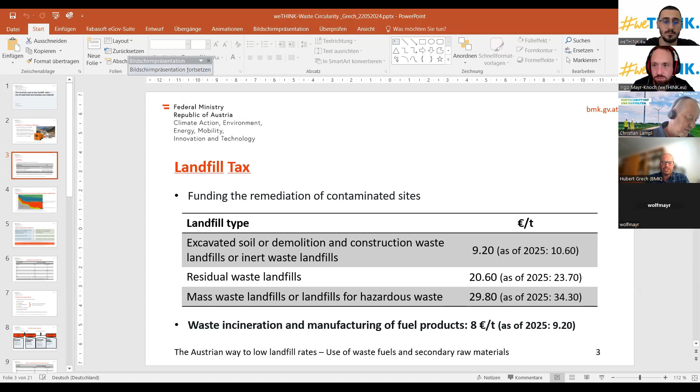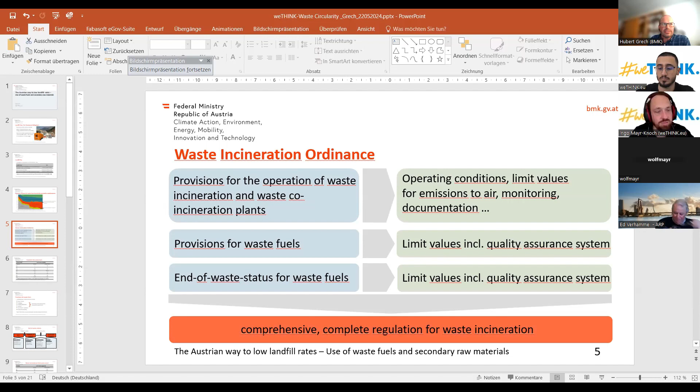And additional to these limit values, we have a very comprehensive quality assurance system. This quality assurance system consists of the input control, the sampling, sample preparation, analysis. You need an assessment certificate and an external monitoring. And the three important parts, the sampling, preparation, and the analysis, have to be carried out according to the international standards of the ISO TC 300. So we have a unique application of these different provisions because of these international standards.

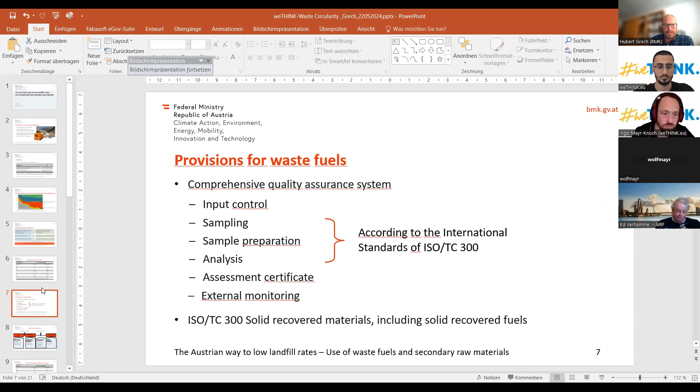Now some details about the end of waste criteria regulation in Austria. It's possible to reach the end of waste status for waste fuels. And here you can see a little scheme of this procedure. Starting with the waste, we have first some exclusions. That means for hazardous waste and medical waste, it is forbidden to reach the end of waste status. Then you have a classical production of waste fuel.

And after this, you have a waste fuel where you can reach the end of waste status when you fulfill some product criteria. These product criteria are above all limit values, but also, again, the provisions for sampling, sample preparation, analysis, etc. If you fulfill these end of waste criteria, you no longer have a waste, but a product, some kind of a conventional fuel. And this fuel you can use as a product. That means you don't need a permit according to the waste management law. And that makes it much easier to use these products in plants outside of the waste management system.

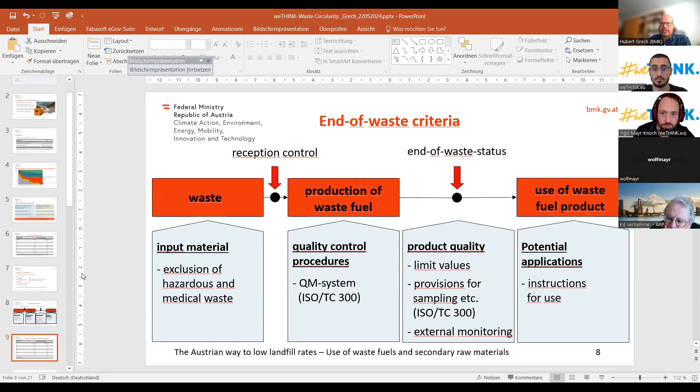We have some instructions for use. That means although you're outside of the waste management law, you have to fulfill some provisions. And the most important provision is that you have to fulfill a limit value for the dust of 20 milligrams per cubic meter. These waste fuel products, let's say we have two types of waste fuel products. The waste fuel products from waste wood, and another type are the waste fuel products that are not from waste wood.

In summary, these limit values are very strict. So you can really reach the end of waste status only with very clean waste fuels. And in fact, nearly 95% of the waste fuels which reach the end of waste status in Austria are biomass waste fractions.

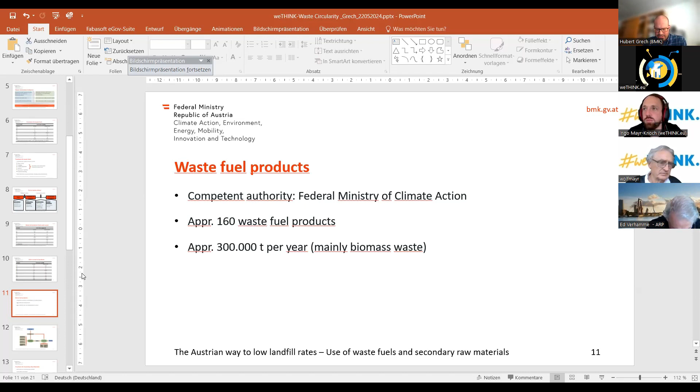These were some details about the waste incineration ordinance. Now I will come to the secondary raw materials. And when I start, I first want to have a look at a simple procedure of the cement production process. You can see there are inputs and outputs in the cement production process. And when you look at the first step, here we have the production of the cement clinker. We have as an input the raw material, the primary fuel, the waste fuel, and the secondary raw material. And as I said before, we already have regulated the waste fuel in our waste incineration ordinance.

One very important output of the production is the flue gas. And the flue gas is also regulated by this waste incineration ordinance. Then we have the production of the cement in the cement mill. Here again, we have the raw material and the secondary raw material as an input. And for sure, the important output of the cement production process, the cement itself.

And here you can see we have some input and output streams where we have no regulations, or let's say where we need a regulation to have a complete system. That means we need a regulation for the secondary raw materials as an input, but also for the cement. And therefore, we have elaborated a guideline for secondary raw materials in Austria. And this guideline regulates the secondary raw materials and the cement. So we have a very complete system of the whole process.

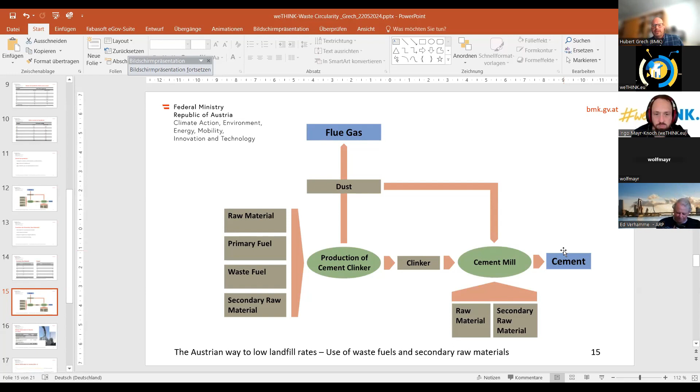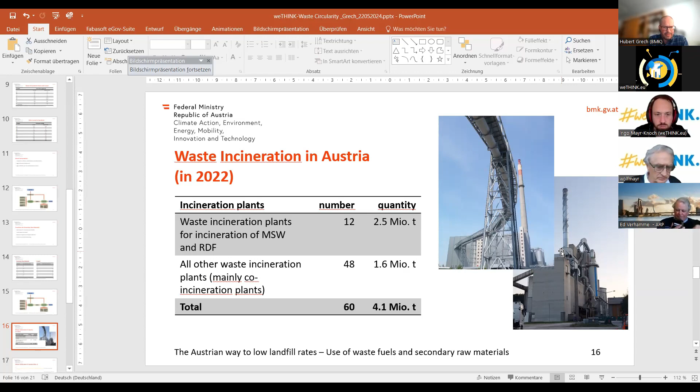On the next picture, you can see the development of the incinerated waste in Austria over the last 10 years. At first sight, you can see it's nearly constant. Even in the COVID crisis, we have a very constant amount of waste incineration. On the second sight, you can see a little increase here in the blue line. This is the line for the waste incineration plants. And on the other hand, a little change in this orange line. This is the line for the co-incineration plants.

The main reason is that we have closed in Austria all caloric power plants fired with hard coal. So we have no co-incineration anymore in these caloric power plants, and that's the main reason why the amount of co-incinerated waste was decreasing a little bit, and on the other hand, a little increase in the line for the classical waste incineration plants. Here in this gray line, you can see our products with a little increase over the last 10 years. As we have heard, we now have about 300,000 tons of products that are incinerated.

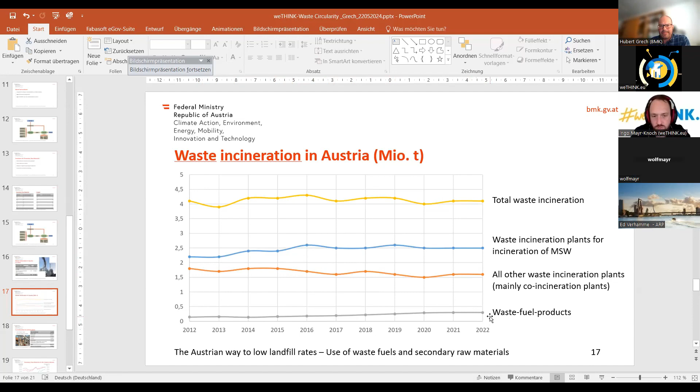Now some figures about the cement industry. We have 8 cement plants in Austria. And these 8 cement plants incinerate nearly 570,000 tons per year. The main fraction are the plastics and the solid recovered fuel with nearly 400,000 tons. And then we have the used tires, the waste oil, the solvents, the paper fibers, and other waste fractions, mainly biomass waste fractions.

What you can see is that the share in the total energy input is more than 81%. That means more than 81% of the thermal energy that the cement industry needs derives from waste fuels. This is a very high rate in comparison to other countries in Europe.